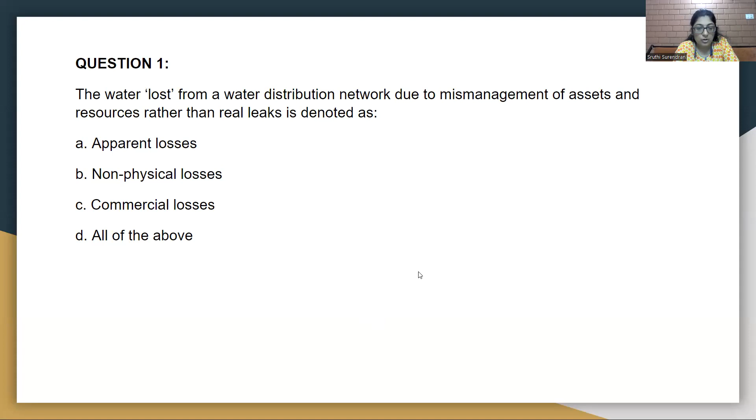The first question is: the water lost from a water distribution network due to mismanagement of assets and resources, rather than real leaks, is denoted as apparent losses, non-physical losses, commercial losses, or all of the above. You can type in your answers in the chat box.

So we'll move to the answers. Water losses mainly are of two categories: one is the real losses or physical losses, the other is apparent losses or non-physical losses. Apparent losses or non-physical losses are also named management losses or commercial losses. Now let's see what these are.

Real losses or physical losses are those losses occurring physically by all means, like when there are leakages in the pipe network, or when the pipe bursts, and when there's overflow in the system components - these are also called real losses or physical losses.

Apparent losses or non-physical losses are not actually happening physically, but it's majorly about the reason why these losses are happening. Even if there are water bursts or overflows, or sometimes theft of water, or faulty meters where the metering system is faulty, such losses are called apparent losses or non-physical losses.

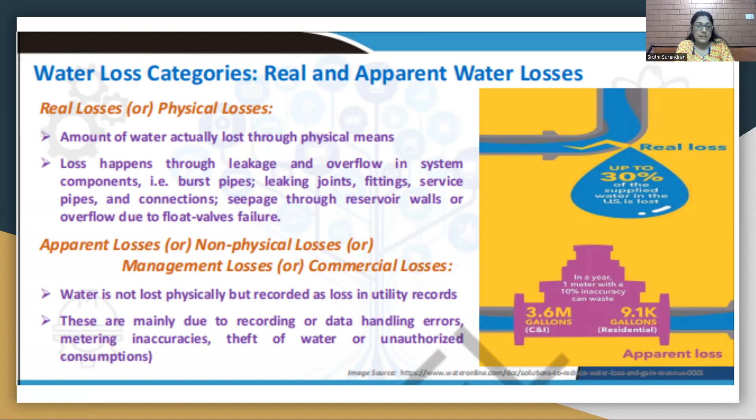So recording or data handling errors, metering inaccuracies, water being stolen, or unauthorized consumption - these kinds of losses come under apparent losses or non-physical losses.

So the answer for this question would be all of the above, because it is the water loss from a water distribution network due to mismanagement of assets, called apparent loss, or otherwise non-physical losses, also called commercial losses or management losses. So the answer would be option D.

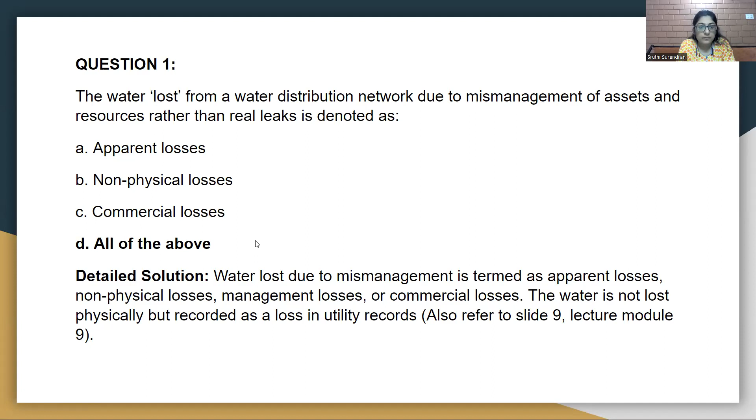Moving on to the second question: seepage through a reservoir or tank walls and overflow due to float valve failure are accounted as - real losses, physical losses, management losses, commercial losses, or none of the above. I'm sure you'll be able to answer this since we've just seen what the two types of losses are.

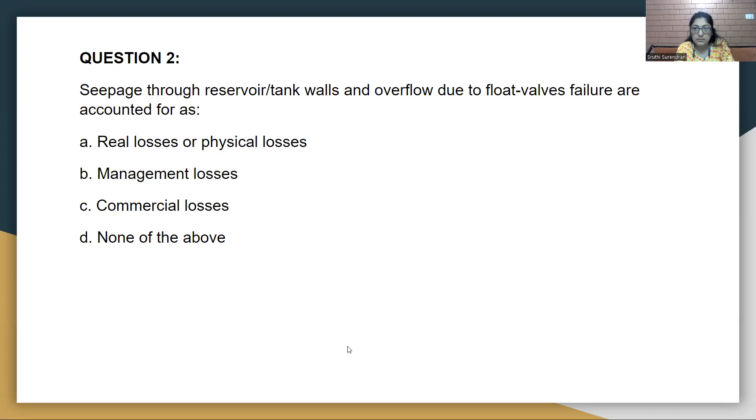Alex said, oh yeah, I'm getting an answer. Sangamitra said A. Alex, you can also just type in your answer, right?

Like we had seen, these occur because of overflow due to float valve failures. As a result of valve failure, there is water loss happening, or when seepage is occurring through these tanks - these are actual physical losses, called real losses or physical losses.

Here are some examples: burst pipes, leaking joints, fittings resulting in leakage, service pipes resulting in leakage, connections - if connections are improper, leakage occurs as a result. When reservoir walls have seepage due to improper lining, or float valve failures causing overflow, all water loss occurring from such reasons comes under real losses or physical losses.

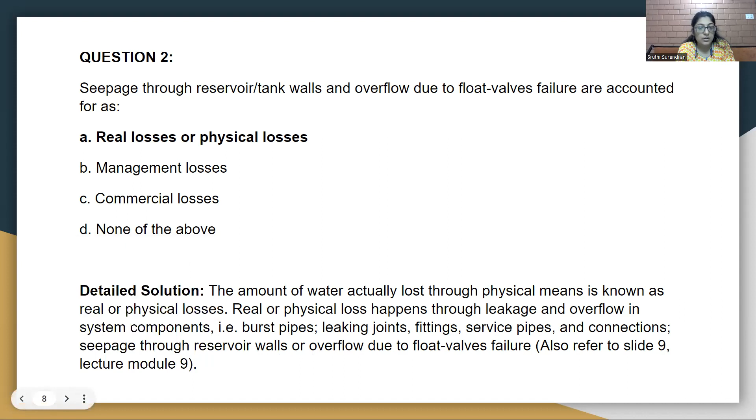Now, before we move on to the third question, I would like to discuss some terms that come up when we have to conduct a water audit. Water audit is nothing but, for whatever water is being input into a distribution network, we have to be able to

So, some of the major components of water balance calculation. Water auditing mainly occurs using the water balance method: how much water is going in as input minus output. If there is a difference in the storage, that amount of water is actually resulting in water that is lost without being used.

It is based on this water balance principle that water auditing happens. The major components of water balance calculation: first is the system input volume. System input volume is nothing but the amount of water going into the distribution network as input, computed as the annual volume of water sent into the distribution system. This is the first term we have to be familiar with, system input volume, or in short form, SIV.

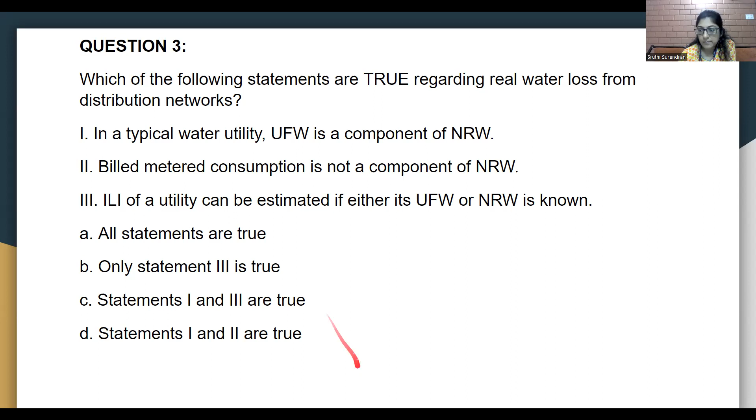Okay, so we'll move on to the answer. So the answer for this question is option D, because 1 and 2 are true.

So in a typical water utility, UFW is a component of NRW. Now, why is it true? We'll just go back into the slides.

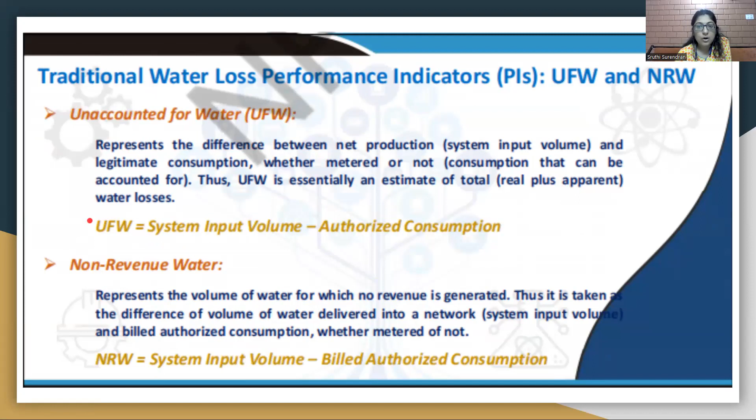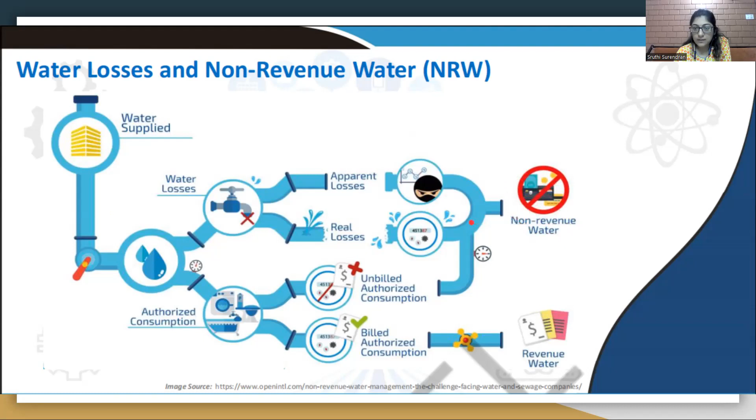We had seen here, what is UFW? It is unaccounted for water, and by definition it's all the system input volume minus the authorized consumption. That is, the total water losses are actually the unaccounted for water. Now, unaccounted for water is also a part of non-revenue water, which is what statement 1 is about.

So in a typical water utility, UFW is a component of NRW, and that statement is true. Now, the second statement says billed metered consumption is not a component of NRW. Let's again go back. Here, billed metered consumption is a component of the revenue water, it is not a component of NRW. So that statement is also true.

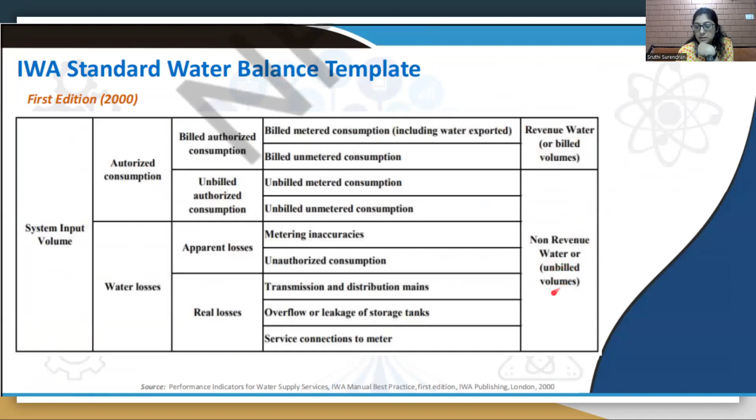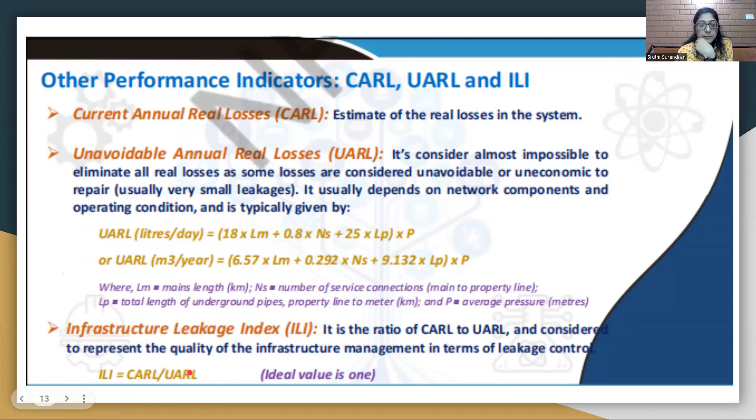Third statement is that infrastructure leakage index can be estimated if UFW or NRW is known, which is false. For estimating ILI, we need to know the current annual real losses, CARL, and unavoidable annual real losses, UARL. So the ratio of CARL by UARL is what gives us ILI. So we cannot estimate ILI with UFW or NRW, but instead estimation is done using CARL and UARL.

So statements 1 and 2 are true, hence option D is the correct answer. UFW is a component of NRW, as NRW includes all the losses. Billed unmetered consumption is a component of the revenue water and not non-revenue water. ILI can be computed using CARL and UARL.

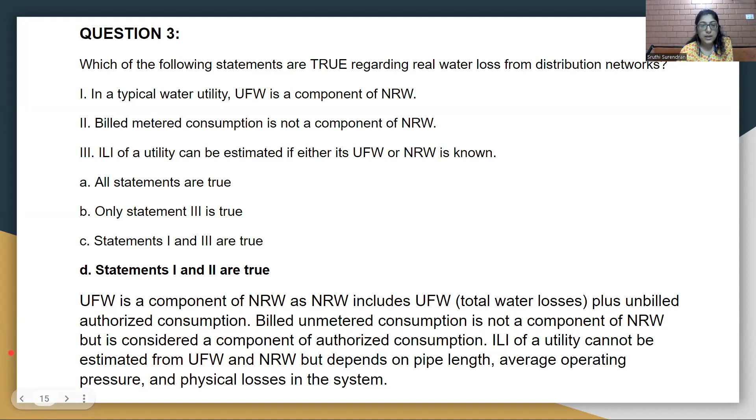Now moving on to the fourth question. The real losses in a water distribution network usually increase with...

Sangamitra has given the answer C. I mean option C is the correct answer. Alex Kuti also said it's C. Okay, let's move to the answer. Mujahid, you can also type in your answers in the chat box.

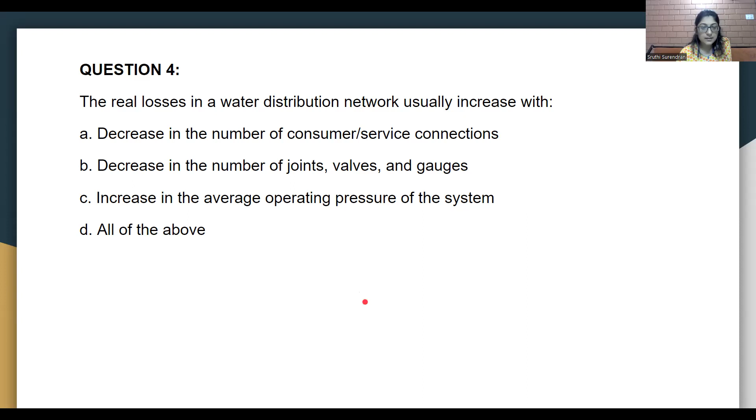So some of the factors influencing real water losses are the following: the percentage of time per year during which the network is pressurized. Network pressurizing is basically the time during which water is going through the pipe and being supplied, that is, when the network is pressurized all the time water is going through the pipelines. So one factor is the percentage of time per year during which the network is pressurized. Again, the average operating pressure, the number of service connections, the number of joints, valves, and gauges, and length of the mains.

All this we are using for calculating the UARL, if you remember from the earlier slide. Then the age of the material, the frequency of leaks and bursts, and the type of soil and ground conditions. So these are some of the factors influencing real water losses.

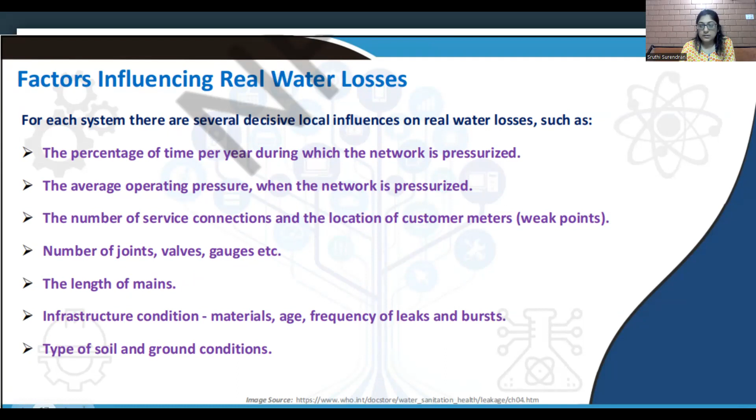So why is it option C? Increasing the number of consumer service connections is one reason real water losses can increase. Another reason is increasing the number of joints, valves, and gauges. Again, increasing the average operating pressure of the system is also a reason for real water losses to increase. So option C will be the correct answer for this question.

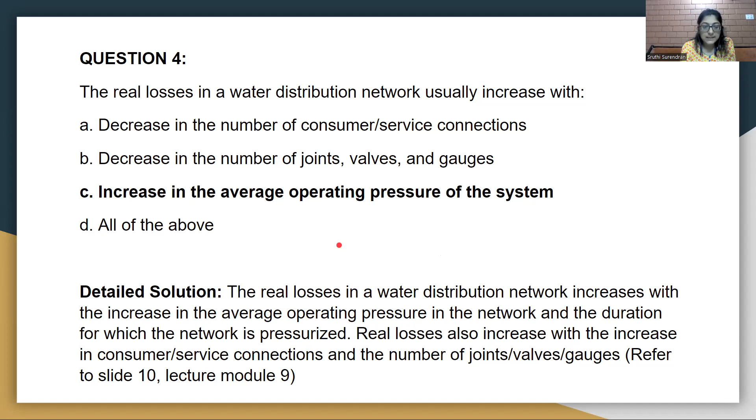Moving on to the fifth question. Unauthorized consumption plus metering and billing inaccuracies in a water distribution network is equal to what? Real losses, non-revenue water, unaccounted for water, or apparent loss?

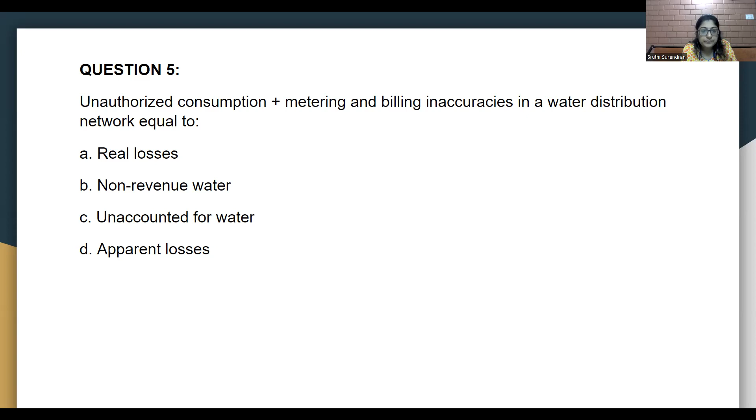What kind of losses? So what component of water balancing does this category belong to? Okay, I'll move on to the answer. If you see in the apparent losses, the categories are inaccuracies in the meter readings, the input output, and unauthorized consumption.

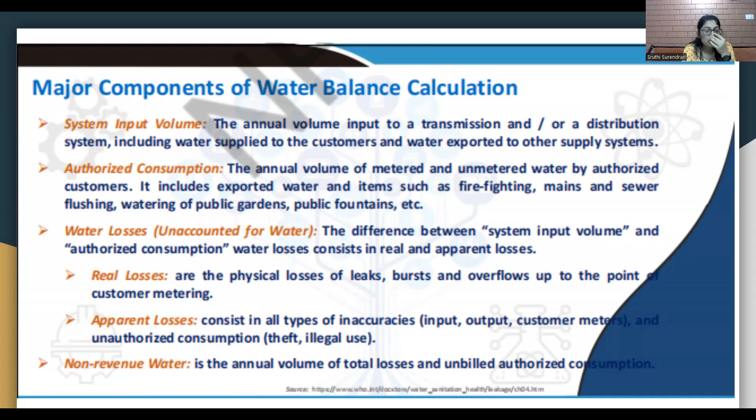Unauthorized consumption is nothing but water that is being consumed without the knowledge of the authorities, which is illegal usage of water or stealing water, coming under unauthorized consumption. Metering inaccuracies is also an apparent loss. So the answer for this question is apparent loss. Unauthorized consumption plus metering and billing inaccuracies come under apparent losses.

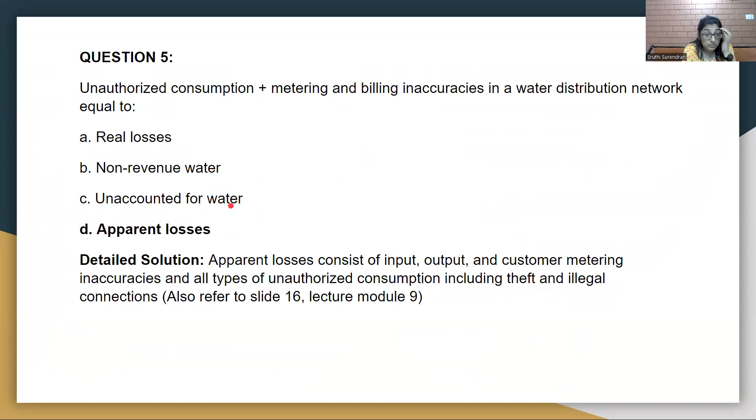Moving on to the next question. The core component of non-revenue water is... I know you should have got an idea of what non-revenue water is and what the other components are, so I believe all of you will be able to give this answer. What does non-revenue water comprise of?

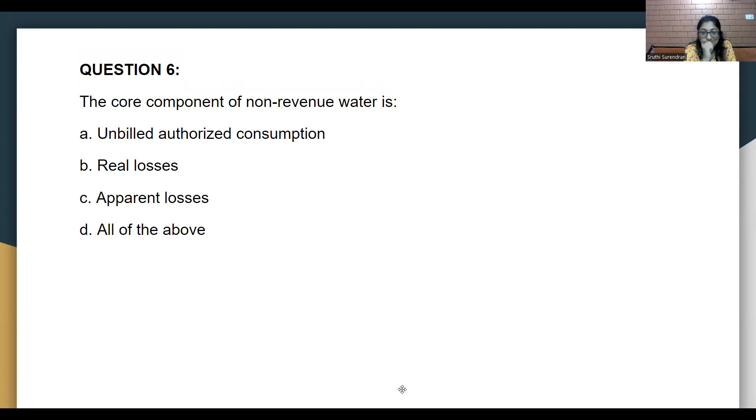Okay, Alexis has given D. Okay, Mujahid has also said it's D.

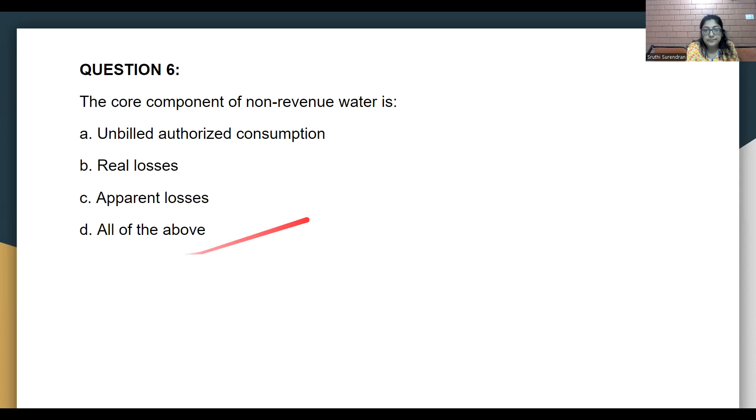So we saw here what non-revenue water is: all real losses, apparent losses, and unbilled authorized consumption. So all of the above is the answer. It comprises of all three components in the water balancing calculation.

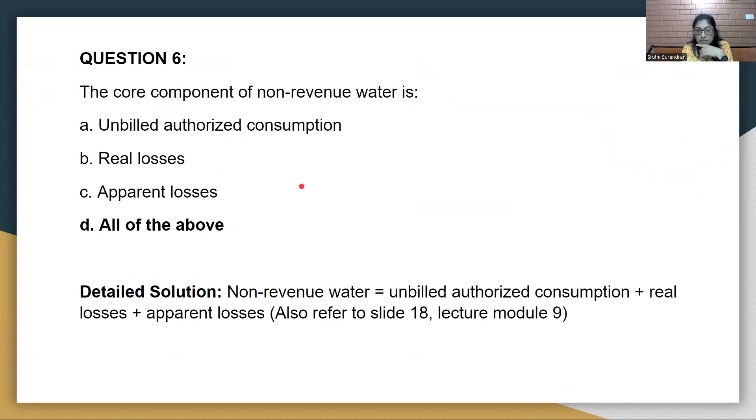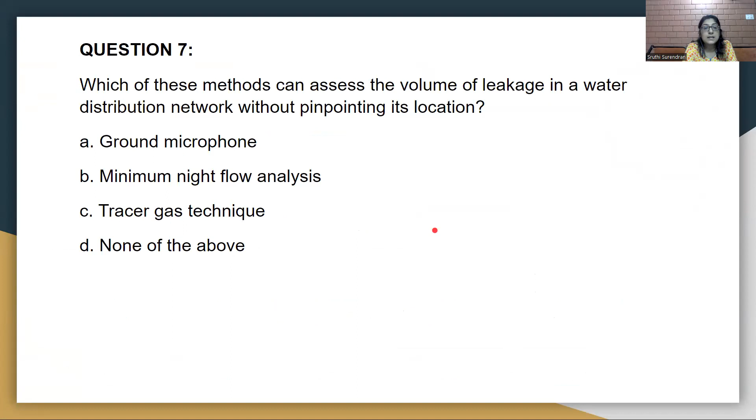Now moving on to the next question. Which of these methods can assess the volume of leakage in a water distribution network without pinpointing its location? This is about how water leakage is detected. These are some of the techniques mentioned here. The question asked is, how can you assess the volume of leakage without actually knowing the location of the leakage?

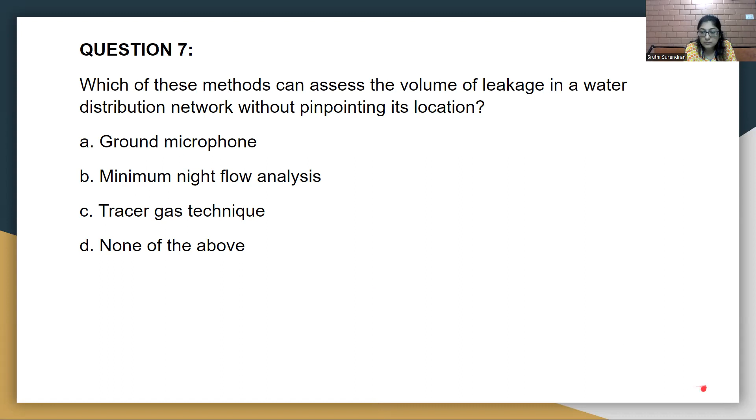Okay, I'll move on to the answer. The answer for this is minimum night flow analysis. Minimum night flow analysis is nothing but, even if we don't know the location where the leakage is happening, the amount of water leakage can be computed through this minimum night flow analysis.

So what happens in minimum night flow analysis is, for a DMA, I'll explain what DMA is later. In minimum night flow analysis, the time period between 2 a.m. and 4 a.m. is one period when water usage by users is very less. So if during this particular time the water use is very high, then that water usage is considered as a result of leakage. It is on this principle that minimum night flow analysis works.

Under minimum night flow analysis, one important equation is the pressure leak relationship suggested by Lambert, given by L1 by L0 equals P1 by P0, the whole raised to power n, where L indicates the leakage, P is the pressure in the pipes, and n is the exponential coefficient, varying from 0.5 to 1.5 when the leakage is considered a fixed area leakage path. If the leakage is considered a variable leakage path, then it becomes 1.5. So this is one important relation when it comes to minimum night flow analysis.

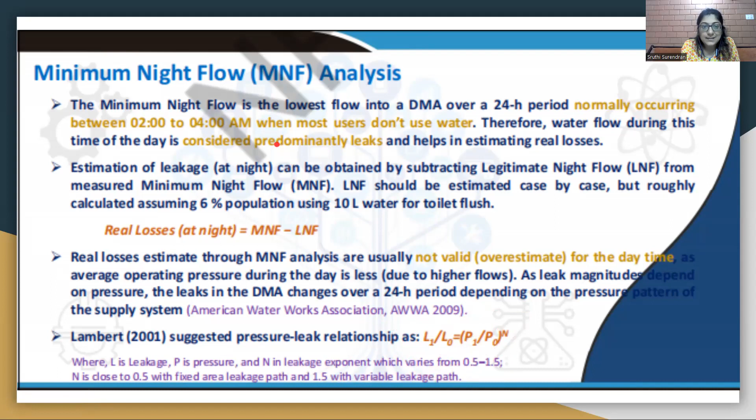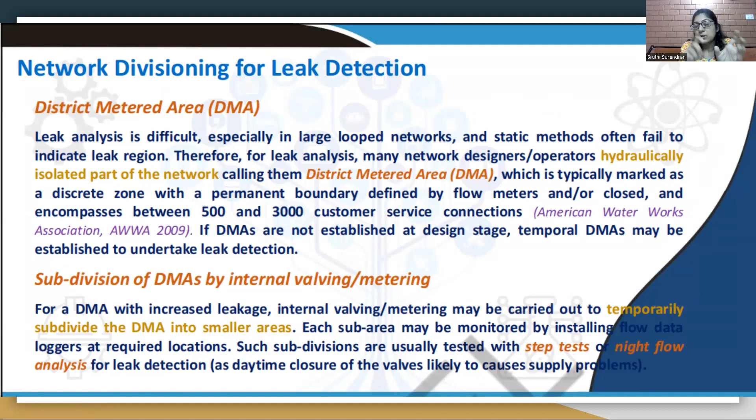Now we see a term called DMA. DMA is nothing but when the entire distribution network is zoned or demarcated into areas based on certain conditions, then it is called a district metered area. So in a particular district metered area, this 2 to 4 a.m. water flow is analyzed, and if there is unusually high usage of water during that time, then it is considered as that amount of water calculated as leakage water and not actual consumed water.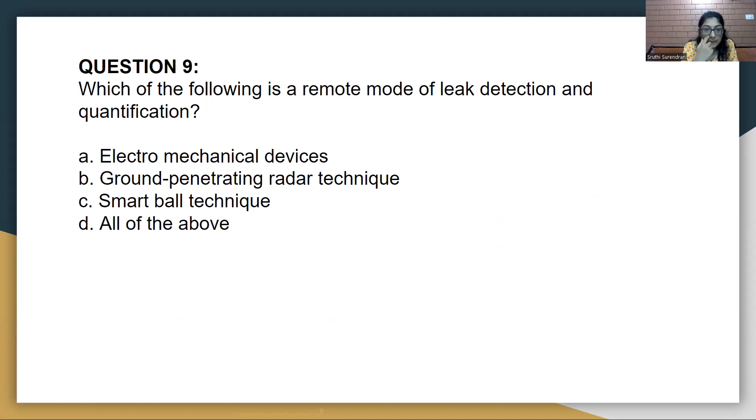Okay, so we'll move on to the answer. So these are some different techniques, a few of the techniques for leak detection and quantification, some advanced methods.

Infrared thermography makes use of infrared images to understand where leakage is occurring and where it is not. Then there's ground penetrating radar, again making use of electromagnetic waves transmitted into the ground to understand the leak location. Then there are leak detecting robots. One example is SmartBall, which sends robotic devices through the pipes or through the ground to understand where the point of leakage is.

Same is the case with some micro electromechanical devices like sensors, which help us detect the leak. And data sensing and analysis based software also makes use of artificial intelligence and other statistical approaches and data analysis techniques to understand where the leakage is occurring.

So in this, the ground penetrating radar, leakage detecting robots, and micro electromechanical devices are actually being placed close to the leakage system or on the pipelines for understanding the leakage. So they are not remote techniques. Instead, infrared thermography is one.

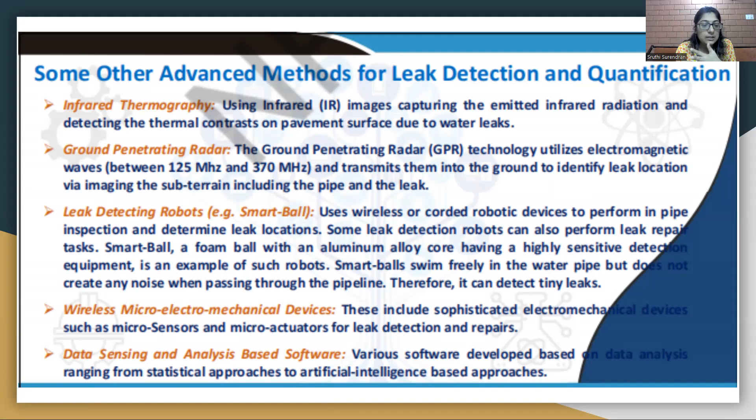Infrared thermography and ground penetrating radar... did I say ground penetrating radar is not remote? Okay, the leakage detecting robots and wireless electromechanical devices—the third and fourth ones—are not remote methods. They actually employ devices near the leakage system to understand where the leakage is. But infrared thermography, ground penetrating radar, and data sensing techniques are remote processes.

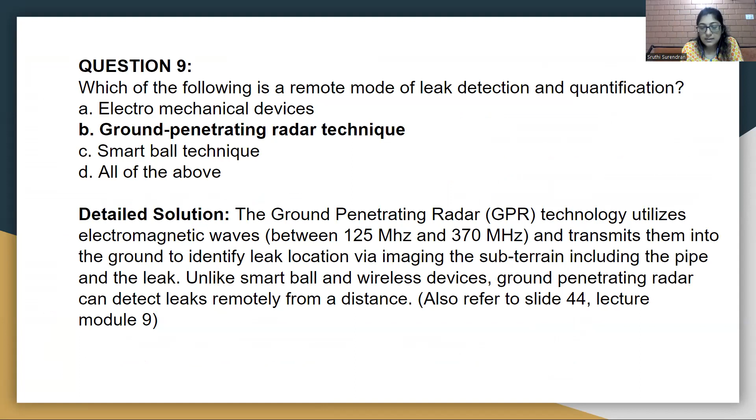So the answer for this is the ground penetrating radar technique. It is a remote mode of leak detection and quantification. There are also other techniques like the ground microphone technique and tracer gas technique, available in the lectures. You should also go through that.

Now we are coming to a numerical based on NRW, non-revenue water—well, it's not really a numerical, just a simple computation. Here, an urban water utility is pumping an average of 600 million liters per day of treated water into a water distribution network. The authorized consumption is 525 million liters per day.

And the revenue from the billed metered connection is 475 million liters per day. So here the system input volume is given, the authorized consumption is given, and the billed metered connection consumption is given. We are supposed to calculate the approximate value of the NRW, non-revenue water, and the unaccounted for water respectively. I think I can give you a few minutes to go through this problem. These are based on whatever components we had studied, simple mathematical computations.

I'll help you with this slide, which gives us a relation between UFW, NRW, SIV, etc. So here, UFW is equal to system input volume minus the billed authorized consumption minus the unbilled authorized consumption—that is, authorized consumption altogether, both billed and unbilled. So SIV minus billed authorized consumption minus unbilled authorized consumption will give us UFW, or we can take the sum of the real losses and apparent losses if that value is given.

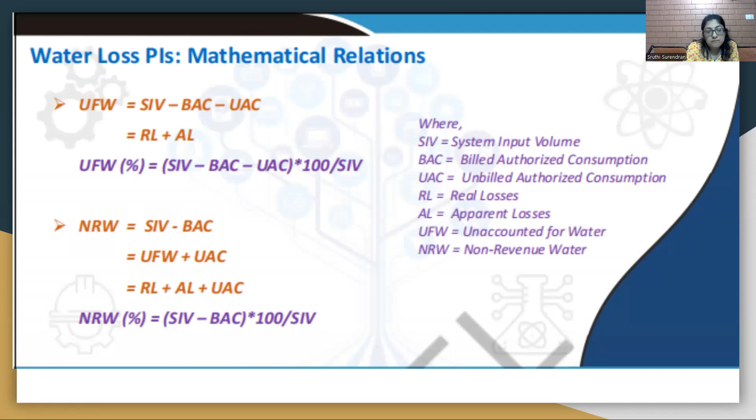Will you please show the question? Yes, sure.

Zahid has given the answer D. Sanghamitra, you also try, and we'll wait for you to complete.

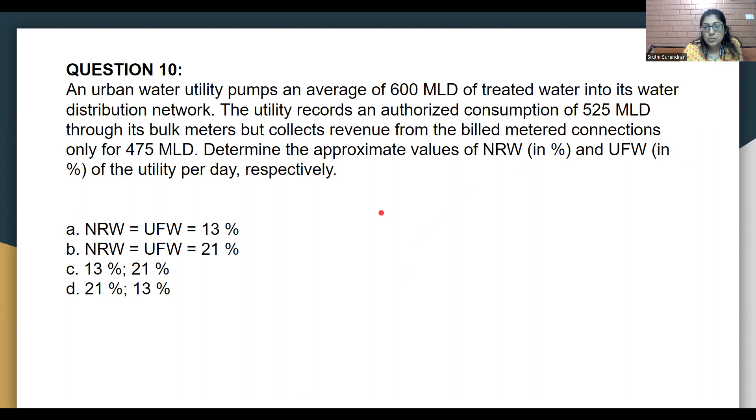Okay, Alex has also given us an option. So the option you've given here is D.

Let's just see into the calculation. The system input volume here is given as 600 million liters per day. Authorized consumption given is 525 million liters per day. So unaccounted for water, UFW, is equal to 600 minus 525, which is 75 million liters per day. That divided by SIV gives us 12.5%, almost equal to 13%.

Now, in order to get the non-revenue water, the system input volume minus billed authorized consumption, which is 600 minus 475 as given in the question. Billed metered connection gives us 125 million liters per day. That divided by the system input volume, which is 600, gives us 20.83%, nothing but 21%. So all of you have given the right answer. The correct option for this question is option D.

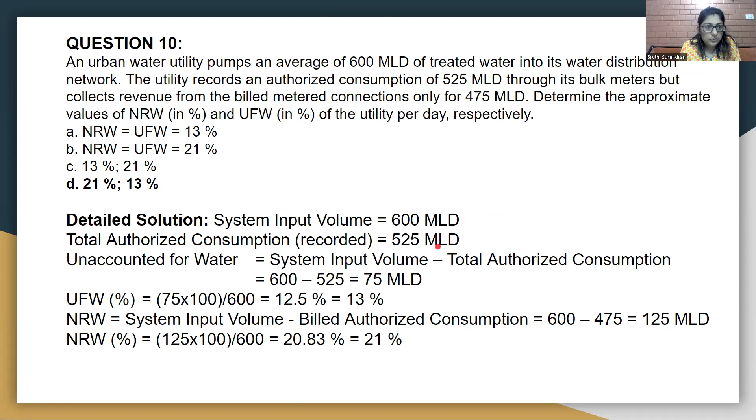Moving on to the next question. This question is about the Lambert equation, the minimum night flow analysis. What they've given here is the leak flow rate in the water transmission line under a pressure of 3 bar, estimated as 12 meter cube per hour. You're supposed to determine the leak flow rate when the pressure is increased to 4.5 bar using the Lambert's equation, given at the bottom of the slide: L1 by L naught is equal to P1 by P naught, the whole power n.

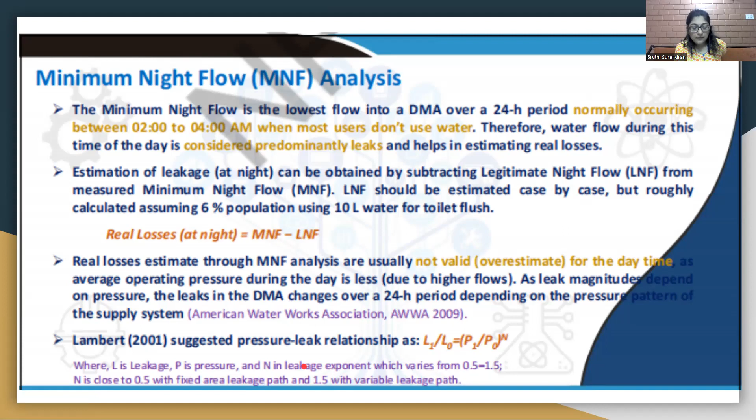So you have to compute. This is a very simple formula. There is one leak flow rate provided, two pressures provided. The n value is considered as 0.5 if it is a fixed area leakage path, and 1.5 if it is a variable leakage path. So you can consider the fixed area leakage path, n value equal to 0.5, and compute the leak flow rate when the pressure is increased to 4.5 bar, using the formula L1 by L naught equal to P1 by P naught, the whole power n. N is equal to 0.5 because they have said a fixed area leakage path is being used.

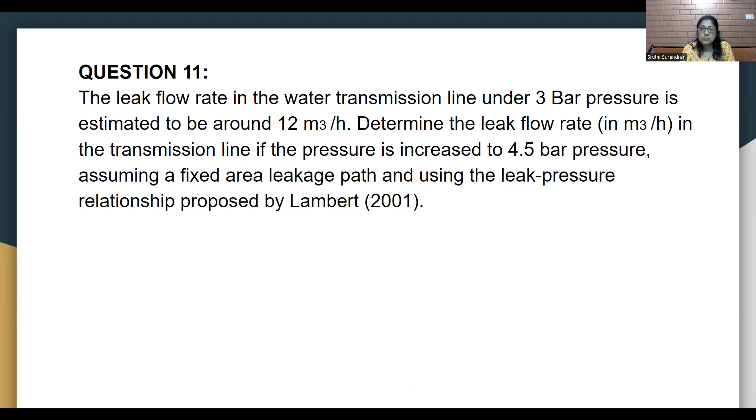Okay, so like I said, the formula is L1 by L0 is equal to P1 by P0. Direct calculation, the correct answer is 14.7. I think Sangamitra had given that answer, I believe.

So here they have given us under 3 bar pressure, the leak flow rate is 12 meter cube. That is L0, and P0 is given as 12 meter cube and 3 respectively. They have also given the pressure P1 equal to 4.5. You are supposed to calculate L1, with n equal to 0.5. So using this computation, L1 equals L0 into P1 by P0. P1 is 4.5, P0 is 3, L0 is 12, the whole power 0.5. The answer is going to be 14.7.

So that is about this Lambert relationship between pressure and leak flow.

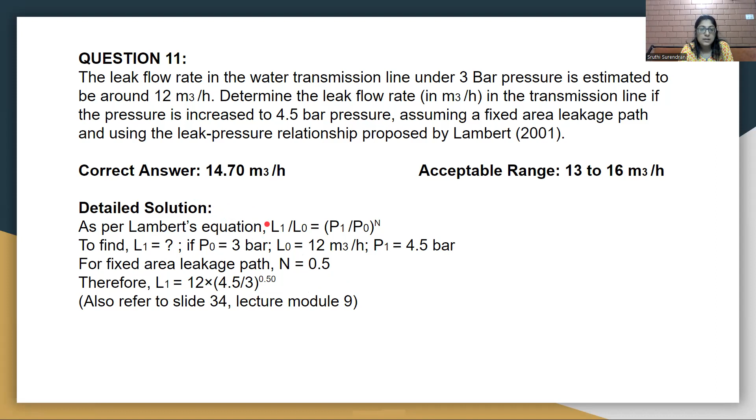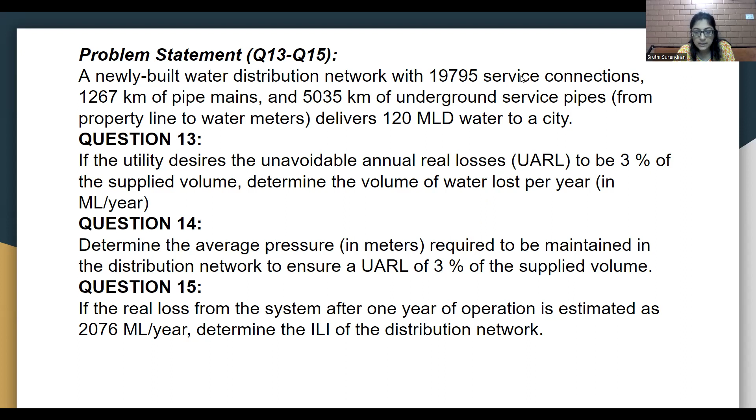The remaining of you can go on to the second question, question number 14. They're asking us to calculate the average pressure required to be maintained in the distribution network to ensure a UARL of 3%. So we calculated the UARL of 3% of supplied volume, and you can make use of this formula to compute the UARL. If you can take down this formula, then we'll go back to the question.

Or yeah, this is the answer for all 3 questions - you can go back to the question. The number of service connections is 19,795. 5,035 is the length of the underground pipe, and 1,267 is the length of the main pipe. You're supposed to find the average operating pressure - I'll write it down here.

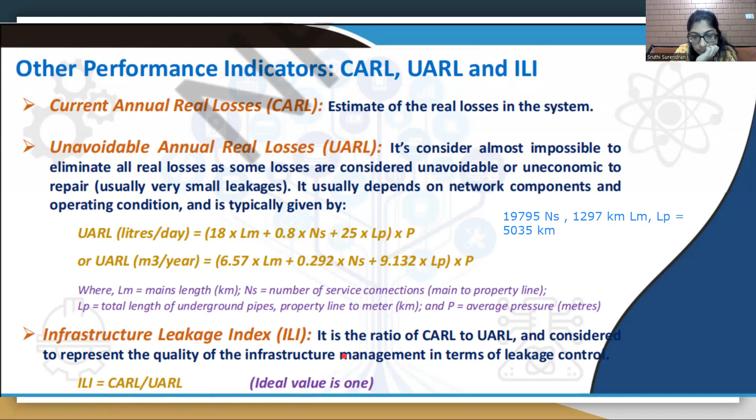Ms. Mujahid and Sangamitra, are you trying? If you've finished the 14th question, you can go to the 15th question.

I think Alex, it's because maybe you might have used the wrong formula, probably why you're getting this answer. There's one formula for liters per day and one for meter cube per year. We got the answer as 1314 million liters per year, so we have to use the formula corresponding to that. Liters per day cannot be used; we have to use the second formula, meter cube per year. For that, you will have to convert the million liters to meter cube and then use the second formula. Probably you will get the answer.

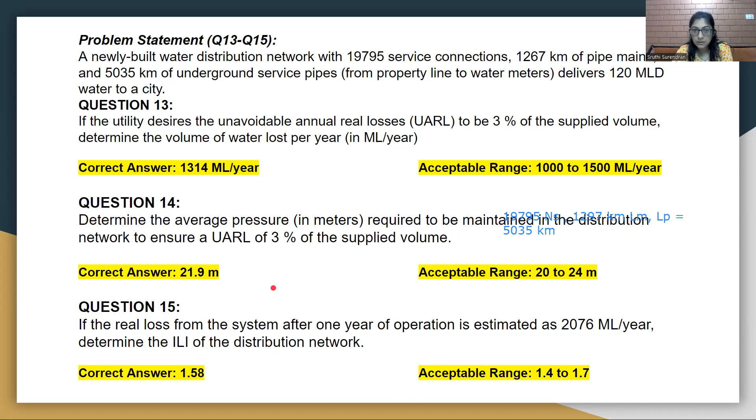Okay, so that was about these three questions. First, they have given us the water supplied per day, which is the system input volume. When you multiply it, the annual total volume is the system input volume, so you have to multiply it with 365 days. You will get a total of 43,800 million liters as the system input volume. They have said UARL is 3% of the supplied volume, so you take a percentage of that and you will get 1314 million liters per year. Now, when you convert that to meter cube per year, we can use the second formula given here, which is 6.57 into the length of the main, plus 0.292 into the number of service connections, plus 9.132 into the length of the pipes underground into the average operating pressure.

We are supposed to find the average operating pressure in the 14th question, and that can be found out because we have the UARL value in meter cube per year, which is equal to 21.9 meter. After that, CARL has been given, which is the current annual real loss, which is 2076. We also know that 1314 is the UARL. So CARL by UARL will give us the infrastructure leakage index, which is 1.58.

So this is another problem that makes use of simple formulas, and something that you have to be aware of is the units in this. As in all the problems in water supply engineering, unit conversion is an important thing, so we have to always be careful of that.

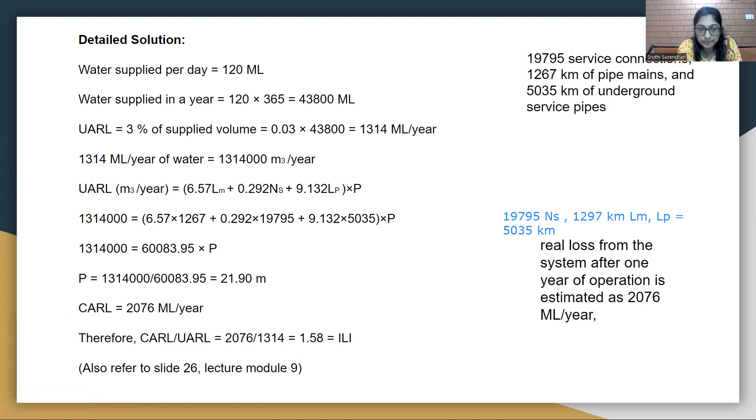Now, last class I had told you that we discussed some of the assignment questions since the assignment solutions have not yet come, so I have solved a few numericals of the week 8 assignment. We'll move on to those questions.

Question number 11, which was about this pipe, I guess you'll all have the answers to it. If you have, you can just cross check with the answers. Here they have given 3 pipes of length 800, 500, and 400 meters, and diameter 500, 400, and 300 millimeters, connected in series, which are supposed to be replaced by a single pipe of length 1700 meters. We are supposed to find the diameter of the equivalent pipe in mm.

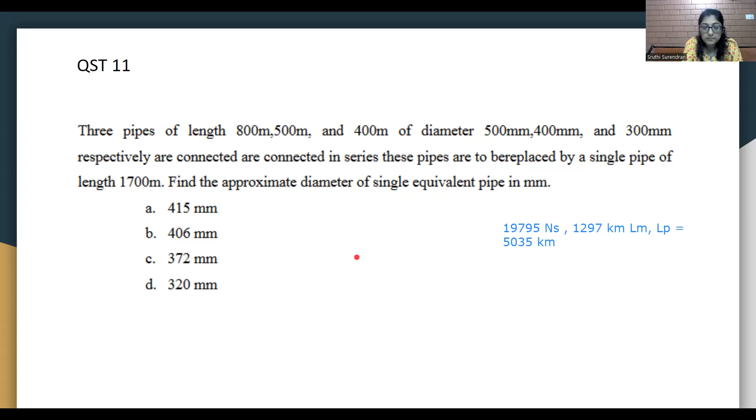So the answer is option C.

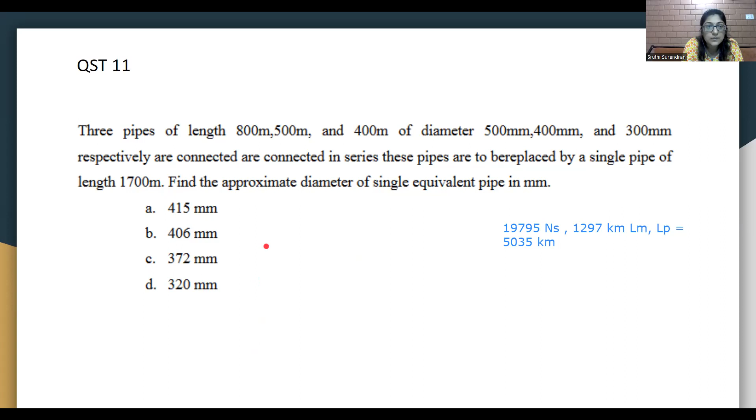So the solution goes using this formula, LE by D to the power 5. We are supposed to find D. We have been given LE, which is 1700, and the lengths of the individual pipes and diameter of the pipes in millimeters. Converting it into meters, you put it directly in this formula and you get it as 0.372 meters or 372 millimeters.

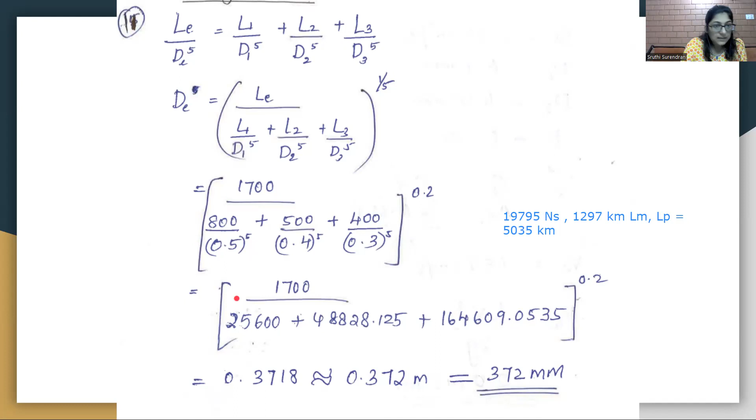Now the next question is determining the head loss, and I wasn't getting an answer for that, which is coming in the range of this question. So where all of you getting the answer for that question, which is actually asking for the head loss?

The question asked is using a Darcy-Weisbach factor of f=0.025 and pipe velocity 3.5 meter per second. They're asking you to calculate the head loss, and the answer given is 2.85 meters. Were all of you able to get that answer, or were you getting a different answer? Because I wasn't getting the correct answer, I was getting a different answer, so I just wanted a clarification on that too.

Sangamitra, Mujahid, Alex, anybody? So is it FLV square by 2GD? And if we use it, I got 71.33, right? Right, even I was getting 71.33.

Did Mujahid and Alex also do the question? Or maybe you can just try it now. Were you able to get the answer 2.85 meters by any chance?

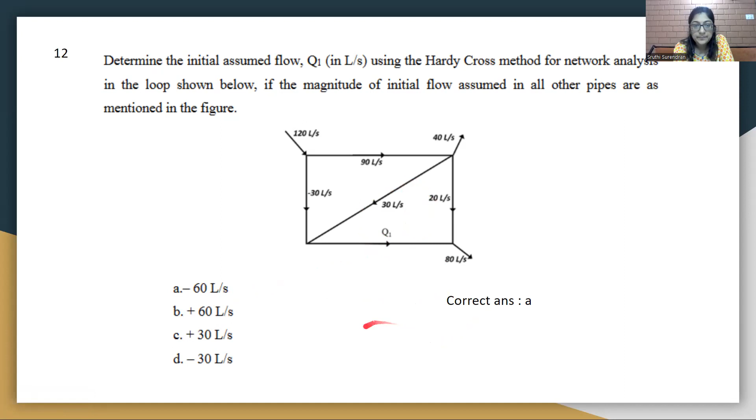Correct, Mujahid, that's right. But then since the values here are given with negative and positive, and since arrows have been given in this network, it is important that you put a plus or minus sign based on the direction of the arrow. If it is in anti-clockwise direction, it will be minus. If it is in a clockwise direction, it will be a plus. So that is how this problem is done.

Can you solve it? Actually, you proceeded in clockwise direction from first point to second point. No, if we proceed in anti-clockwise direction towards first point, as naming is not done, so I'm saying like this instead. No, they have given us the direction, right? Already they have given us the direction, so just go by that. Okay, 120 liter per second is coming, then 30 liter per second if we consider that branch.

So in that joint, 130 liter per second is coming and another 30 liter per second is coming. Accordingly, what I did was this 120 is being separated into 90 and 30.

Then I stopped there and focused on this 90 liters per second, 40 is going out. From the 90 liters per second, what is remaining? 50 is remaining. Of that 50, 30 is going into this segment, 20 is going into this segment. Now this 20 liters per second is going out, and what is left is 60. That 60 is being contributed by this Q1 segment.

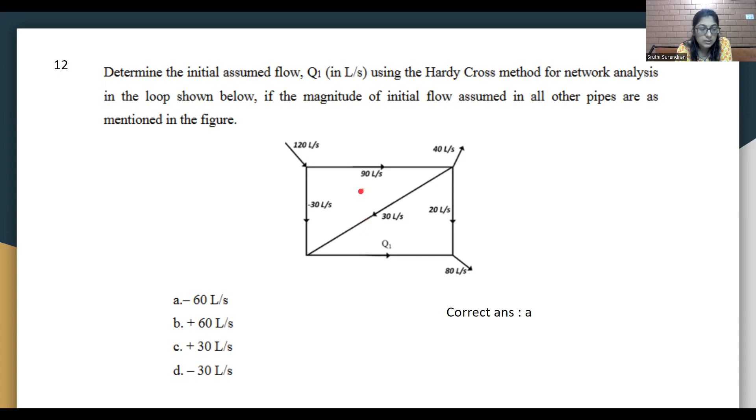So the next question, the 14th question, the previous one was the 13th question, this is the 14th. In that, they have given the diameter of the horizontal pipe carrying water at a rate of 0.25 meter cube per second, and it is reducing from 600 mm to 450 mm. We are supposed to calculate the head loss.

Now here, the head loss being calculated is the minor loss, the loss happening due to contraction of the pipe. They've given the coefficient of contraction as 0.75. So we have to use this formula, K into V square by 2G. And particularly, we have to find out the velocity of the horizontal pipe - the second segment, the reduced segment's velocity, is what we consider when contraction is happening. So using this, directly putting into this formula, we know the diameter of the bigger pipe.

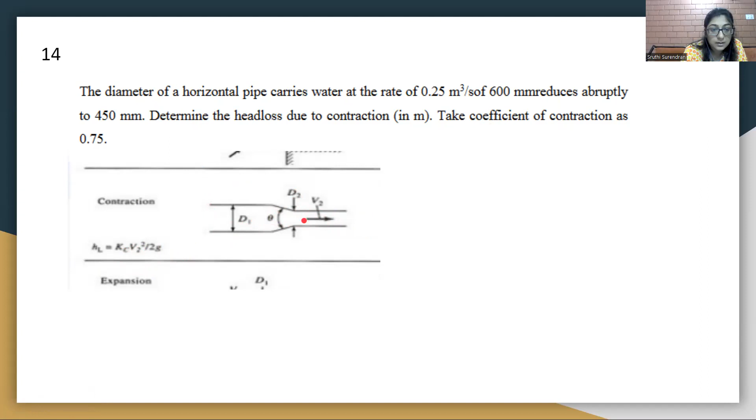The contracted pipe is D2. So the flow is 0.25 meter cube per second. D1 is 600 mm, D2 is 450 mm, the coefficient is 0.75. From the discharge value and the area value - area we can calculate from this diameter, and Q is given - we can find out what the velocity is, V2. V2 will get us 1.573, and then directly putting it in the formula, 0.75 into V2 square by 2G, we'll get an answer which is 0.0945 meter. I hope this is the answer that all of you have got.

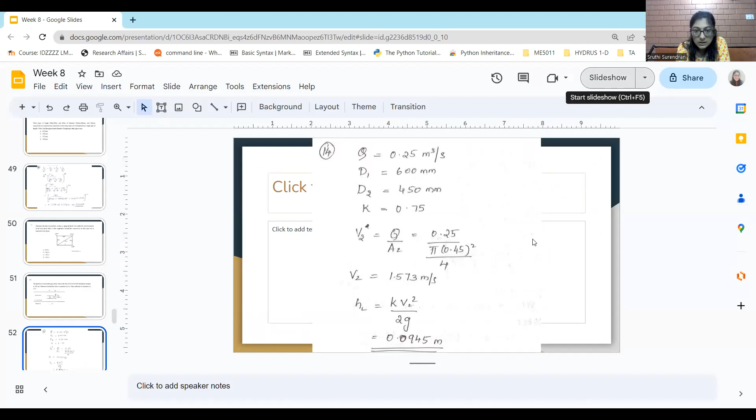Sangamitra, I hope you got this, you were able to solve this. Was this the answer that you also got?

Yes, actually, I did a mistake while solving the assignment.

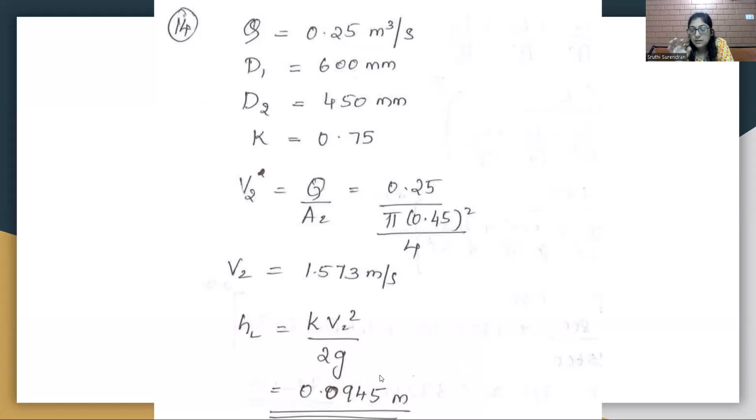Okay, all right. So you can refer to the slides - in that they have given for contraction, for expansion, when it is entering, when it is exiting, what are the different kinds of velocities that you have to take into consideration. Now moving on to the 15th question.

Here they are asking us to find what kind of flow it is by giving the nature of the flow: 200 mm diameter pipe having velocity as 1.85 meter per second. The viscosity is given and the density is given. So we have to find what is the kind of flow over here.

So in this problem, what we are supposed to do is find the Reynolds number. If the Reynolds number is less than 2000, it is laminar flow. If it is greater than 4000, it is turbulent flow. If it comes to a value between 2000 and 4000, it is transitional flow. And if you try solving and there are not enough values, we can choose option D.

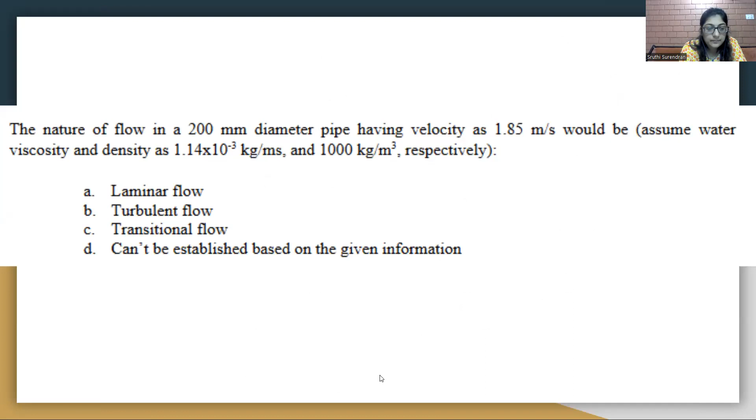So here we have been given the diameter, which is 0.2 meters, velocity, dynamic viscosity, and density. Direct substitution in the formula rho V d by mu, we'll get the answer 3,24,561, which is actually a value greater than 4,000. So hence option B will be the correct answer because the Reynolds value is greater than 4,000.

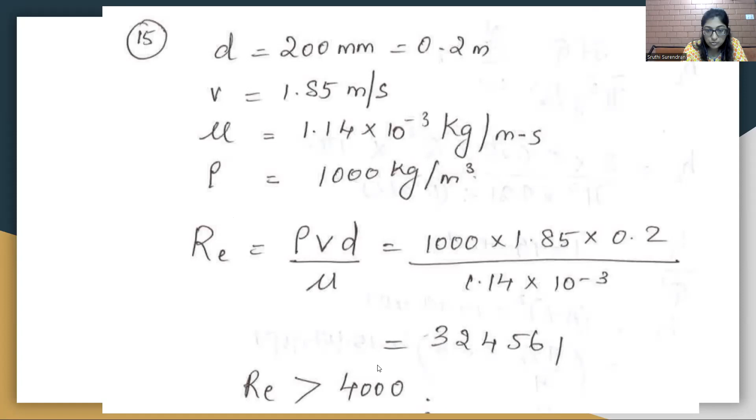Were you able to solve this, Sangamitra? Yes, I got that answer.

Okay, cool. Now we'll go to assignment 7, a few problems. Again, here...

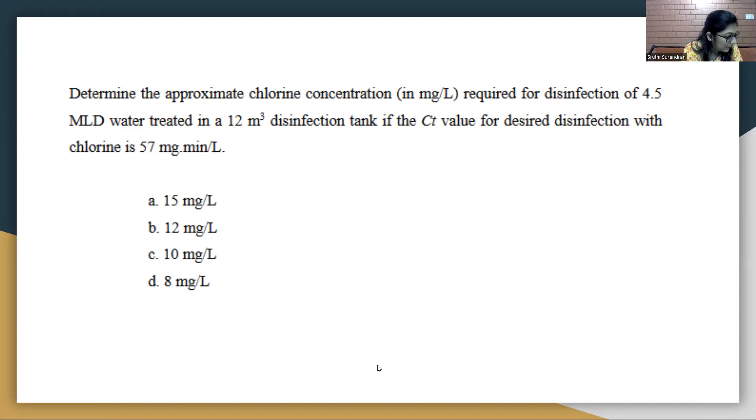This problem asks us to find the chlorine concentration for disinfection of 4.5 MLD of water treated in a tank of volume 12 meter cube, and the CT value has been given. We had done a similar problem in the problem solving session also. So if the CT value, flow rate, and volume are given, we can find the contact time by dividing the volume of water by the discharge, and we get 3.84 minutes. That is after...

converting the value from days. I haven't done that step here, although we get the value in days, we can convert it to minutes because that's what is required in this question.

After that, chlorine dose can be obtained by dividing the CT value by this contact time, which is 57 divided by 3.84, giving us 14.84 milligram per liter, which is 15 milligram per liter. So this is how the 11th question in assignment 7 is done.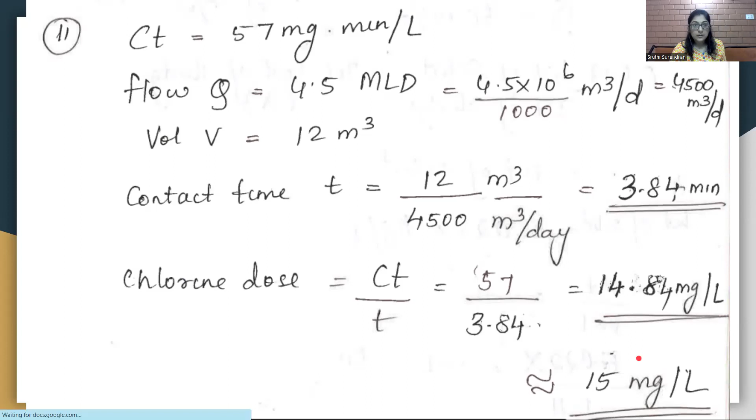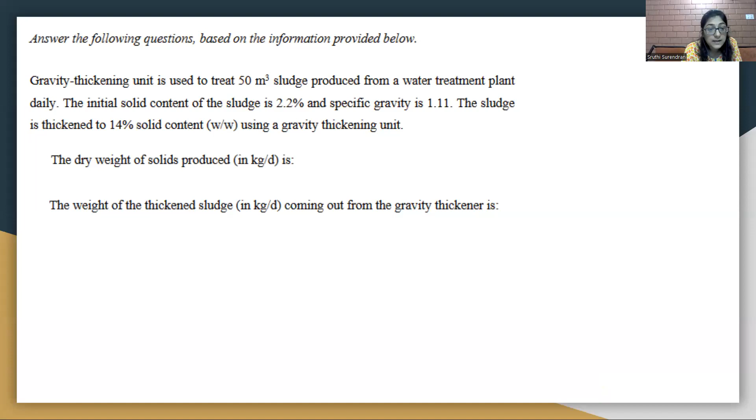That was the first question, dry weight of the solids produced in 1 day. Now, the weight of the thickened sludge coming out of the gravity thickener was the next question. So we know the weight of the solids is 1210 kilogram per day.

They have given the thickened sludge coming out as 14%... that is weight of solids by weight of sludge. So to calculate the weight of sludge, we divide weight of solids by this percentage, which gives us weight of the sludge, and that value comes to 8642 kilograms of sludge. Although I think the answer provided is in the range of 8700 to 8750.

I'm getting this answer. If anyone of you has done it, Sangamitra, Mujahid, or Alex?

Actually, in question number 12, weight of solid I got 1221 kg per day. So actually you got 1210, I got 1221. Then, accordingly in question number 13, I got 8721.42, by dividing 1221 by 0.14.

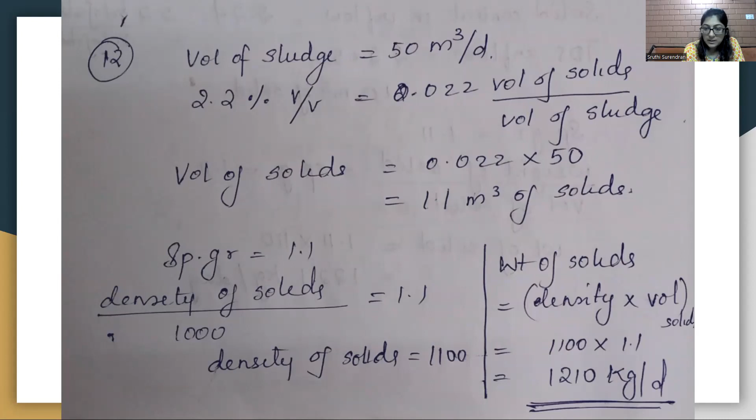No, same thing I have done. But the thing is, actually now I lost my calculator, so I'm doing it on my mobile. In the calculator, you might have set the digits after the decimal point differently, whether 3 digits or 9 digits after decimal point, so some range difference will come. So I mean, if the method is correct, maybe calculations differ slightly here and there, and the values might change.

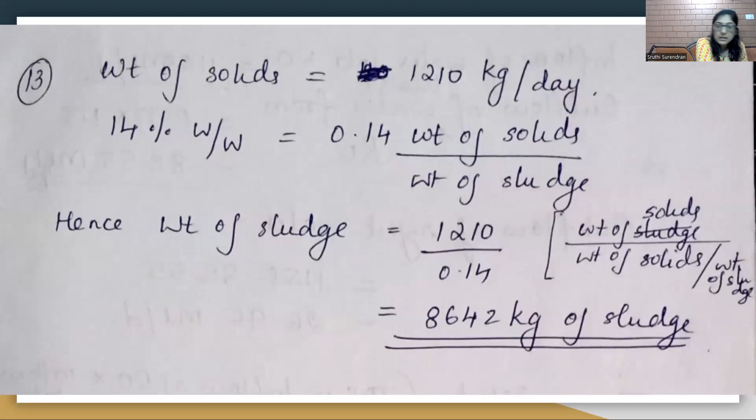So yes, this is how the problem is done. I'll also go through the calculator issue and reset it and try doing it once again. Okay, so here is the 14th question.

Treated water from a 15 million liter per day filtration unit outlet with TDS 850 milligram per liter is further treated by UF followed by RO. The UF is treating 100% of the water coming in and removing 25% of the solids from it. Then the water goes into the RO, where 96% of the TDS is removed, and only 77% of the water is being treated. Two questions have been asked: the TDS level in the RO treated water, and the TDS level in the reject.

Again, for the TDS level in the reject, I'm getting some weird answers, so I didn't put it in the slide, although I'll verify the calculation with you guys.

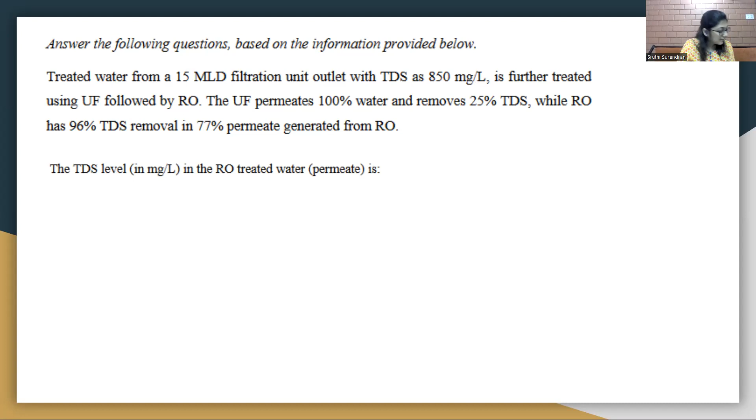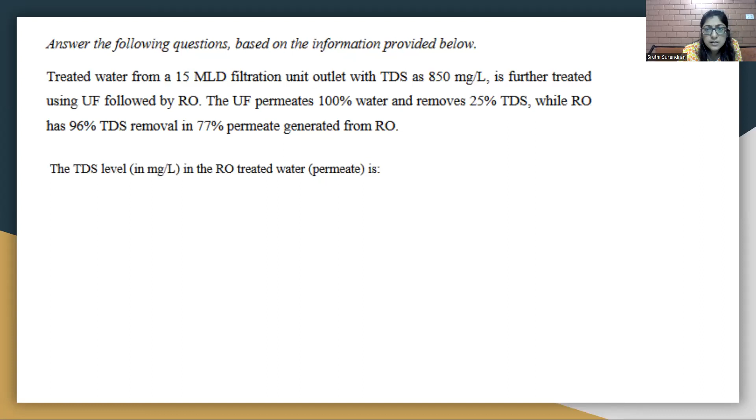So for calculating the TDS removal in the 14th question, the TDS level in RO treated water - this is how I've done the calculation here. TDS removal is said to be 25% in the ultrafiltration unit. So we know the TDS in the permeate or treated water is going to be 75% of the TDS that came inside, which was 850 milligram per liter. When you multiply by 0.75, you get 637.5 milligrams per liter.

Now, the ultrafiltration unit is treating 100% of the water coming inside. So the inflow was 15 million liters per day, so the inflow in the UF will also be 15 million liters per day.

Now let's go to the RO. Water is now going from the UF to the RO. RO is only treating 77%, releasing only 77% of the water as treated water. So when you multiply 0.77 by 15, you get 11.55 million liters per day.

Also, they have said RO is removing only 96% of the TDS, so the TDS in the RO permeate or treated water is going to be 4%. So when you multiply 4% with this TDS from the UF, you get the final TDS of 25.5 milligram per liter. Is this somewhat the same answer you're getting, or are you getting a different one?